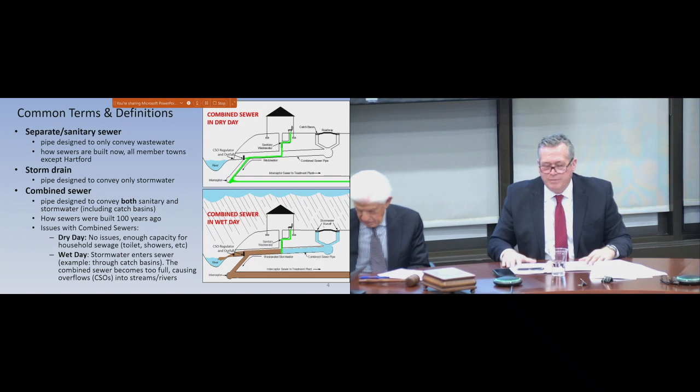So with that, I'm going to turn this over to Jason Waterbury, who's our Assistant Manager of Engineering. Thank you, Scott. Jason Waterbury, Assistant Manager of Engineering here at the district.

Before I get into the gist of this presentation, I just want to go over some simple terms and definitions that you'll hear me reference, or hear Joe Liberty of CDM reference. One of the key things is the difference between a combined sewer and a separate sanitary sewer. Within the city of Hartford, most of the pipes in the road are considered combined sewers. Basically what that means is that all of your sanitary wastewater from your house flows into one pipe, and the stormwater from the street drainage flows into that same pipe.

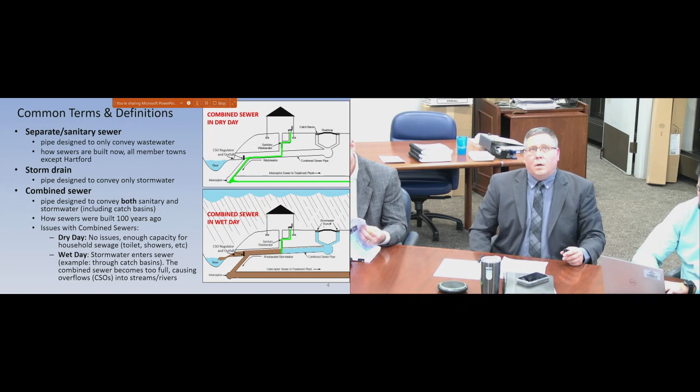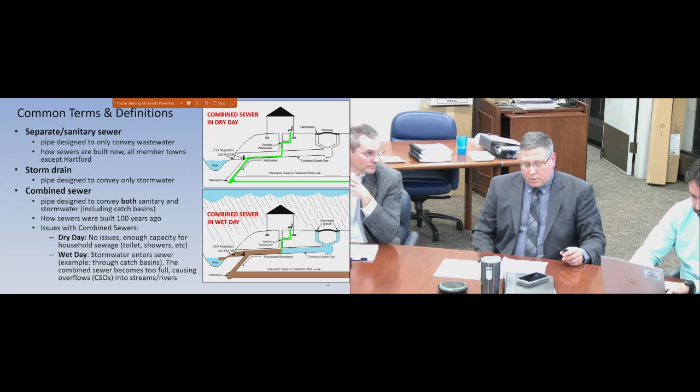It functions perfectly fine on a dry day. However, on wet days, that system gets overwhelmed, and that's when we experience problems, whether it be flow from the sewer backing up into a house, or leaving the system through a designed overflow point, which I'll show on another slide. Outside of Hartford, the majority of the pipes are considered separate, meaning there's a separate pipe for sewer and a separate pipe for storm drainage. One of the key focuses of this new refined plan is sewer separation work as a primary objective for compliance with our consent order. One of the goals and benefits of sewer separation is that it provides full protection of your basement from sewer backups due to wet weather incidents.

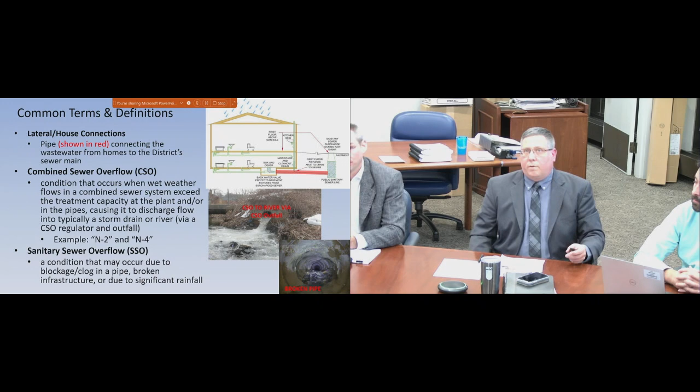This next slide is more terms and definitions, but the biggest one is shown in red, top right: the lateral, or house connection, which we reference quite commonly when talking about the work the district's doing. That pipe, the lateral house connection, is the pipe that goes from your house to the sewer main in the road. It's shown in red on this slide. It's roughly half private property, half public property, but it's the key point that gets wastewater from your house to the road. If it becomes deteriorated or clogged, that's when you start to experience problems. One of the community benefits, which I'll get into later, is the renewal and replacement of that pipe.

As Scott mentioned earlier, we worked on a revised plan with DEEP and EPA starting in early 2023. That plan changed the focus point from our prior 2018 plan, which was approved in 2022. The main difference between the two plans is that our 2018 plan, approved in 2022, did not include or put priority on private property work, whether it be the separation within your house or the renewal and replacement of the lateral itself.

The goal alternatively was to focus on the CSOs themselves. Those are the points where the wastewater will leave our combined sewer and go to the surface water body.

In response to some concerns from the public that Scott had mentioned, we revised that plan. It was memorialized in July 2023 with a new consent order.

The key revisions included expediting private property work, specifically in North Hartford. We increased our spending plan between now and 2030 from $50 million to $150 million in North Hartford. We could not do this work in that manner or schedule without the financial support of DEEP. In working with DEEP, we came up with a plan to treat this as a pilot to see how effective this type of approach is.

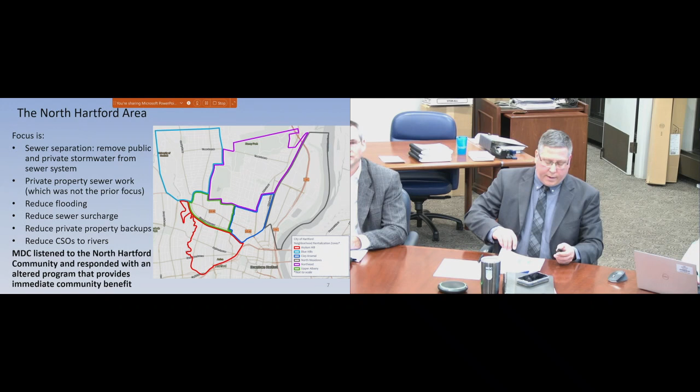Community benefit isn't something we can define very easily, so rather than define it in abstract terms, it was best to give examples of what that really means to the public.

Working right to left on your screen, the 2018 plan, referenced in a couple places, is the original plan that only included about 50,000 feet of sewer rehab or mainline work within the neighborhoods of North Hartford. Our revised plan is 100,000 feet more—essentially 19 miles more of sewer main that we're addressing and rehabbing within North Hartford.

That means 19 miles more of sewer main that is less likely to fail and collapse and cause a backup, an issue, or an emergency repair.

Additionally, our prior plan would have only included about 150 properties where we would have done lateral renewal and replacement, as part of the sewer separation work. Our new plan, in trying to get to this immediate community benefit, includes 3,500 properties. What we did was expedite all of the sewer rehab work that would have eventually occurred within North Hartford, moving it to the front of the program. I'll show that on another slide.

Finally, we know that the sewer separation work, which will provide ultimate protection for homes from wet weather backups, is going to take a long time. So in advance of that work actually occurring, we increased the funding in our backwater valve and private property disconnect program—that's what BWV PPID means on the screen.

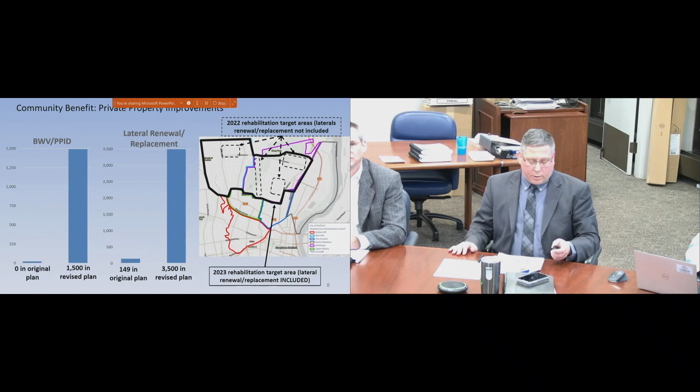One other note is that in addition to the consent order, the district elected to make a commitment that at least 30% of the workforce in North Hartford would be Hartford-based residents. Jeff will get to that, so I don't want to steal his thunder on how we're doing.

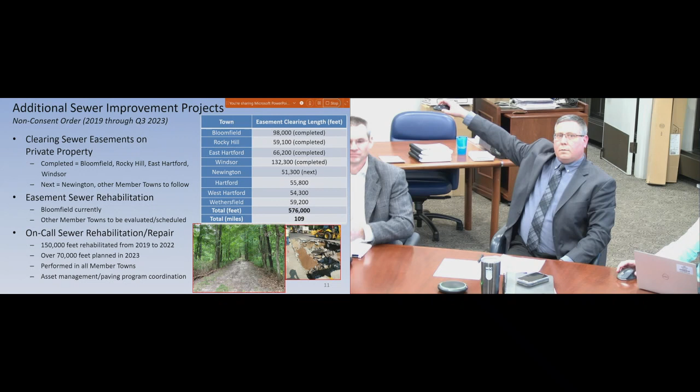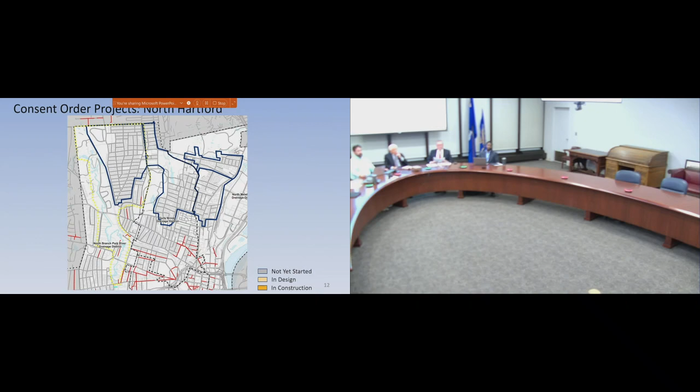I don't want to... point it that way. Technical difficulties. Can you drive or no? Oh, sorry about that. It was working, should I try again? There you go. Nope. Yeah, you did. Oh, no, you're good. Go to the next slide. Yeah, sorry, okay, there we go.

Within Hartford, specifically North Hartford, this slide shows all the consent order projects we're doing. It's going to toggle through, but on the lower right-hand side there's a legend that correlates to the color of the text boxes as they come in—whether it's not started, in design, or in construction.

The first key list of projects we wanted to progress that's in our consent order is what we call our expedited sewer separation contracts. The target was 160 homes that we provide protection to by doing sewer separation work, with an estimate of about 8,000 feet of storm drain.

In reality, we just bid our third package of this work, and with that third package we're at 279 homes of protection and a little over 8,000 feet of new sewer and storm. So we are definitely on track to meet that goal.

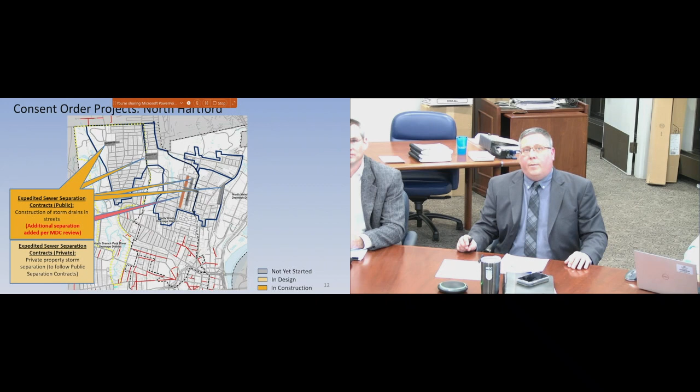One key item is that when these concepts were first conceived back in July, we had an idea of what projects we were going to do. Then through design and talking to the public, it was identified that one neighborhood adjacent to an area we were working in, and that goes through an area we were working in, was experiencing sewer backups and street flooding—the Garden Street neighborhood between Charlotte and Capen. In response, we added it to the bid package of that contract.

Now, the next key item is sewer rehab work in the Tower Ave area, basically Cleveland Avenue and north along Main Street. This includes sewer rehab work and lateral repair and renewal work of approximately 500 laterals. This project started construction back in August and is underway right now. Most of the mainline work is done and they're working on laterals.

The blue area that just showed up on your screen is the North Branch Park River area. This is a large sewer rehab project where we're lining approximately 1,700 laterals and lining all the mainline sewers in that outline. That project was bid and will be starting construction in early 2024.

The greenish colored area is the next big rehab contract, where we're doing approximately 500 laterals and all the mainline work. That one is scheduled to be advertised in January, and we will be beginning construction in mid-2024.

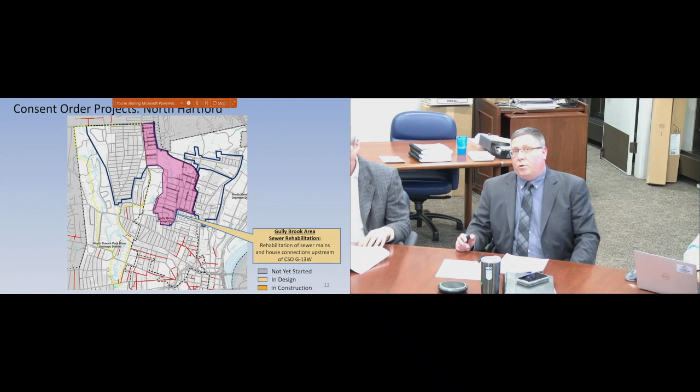And then finally, the pink area, the Gully Brook area. By the way, these names reference drainage areas - it's how our CSO system is managed and permitted. This area is approximately 1,500 laterals, and all the mainline pipe within the footprint of that pink area will be done. It'll be bid in early 2024 and start construction in mid-2024. Collectively, the three that I just showed will be done by the end of 2026.

The yellow area that you see on the screen right now is the footprint of what we call our drainage study. Joe Liberty of CDM will get into more details of this in a couple more slides. However, this is basically the footprint of where we have to do sewer separation work in the North Branch Park River area.

However, when we're doing the design of these projects, we have to take into account and figure out how to get the water from the road into the river. This is an area of known flooding along the river, or known issues with street drainage in general. So in order to make sure that we don't design projects that simply don't work or don't really satisfy the true need in the neighborhood, the district and the city jointly undertook this drainage study.

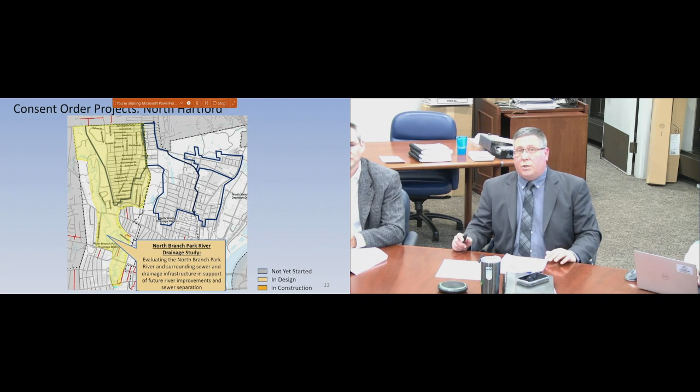So that way the district can design its sewer separation projects to provide the backup protection of the homes and the CSO reduction, and the city can focus on figuring out what needs to be done with regards to the drainage issues within this neighborhood.

From that drainage study, we will get the preliminary design concepts for sewer separation contracts. The first three that we envision doing are what we call Granby 789 - that's the purple area on the screen right now. We expect that design to begin in the middle of 2024. The deadline to have the construction of these three done is the end of 2028.

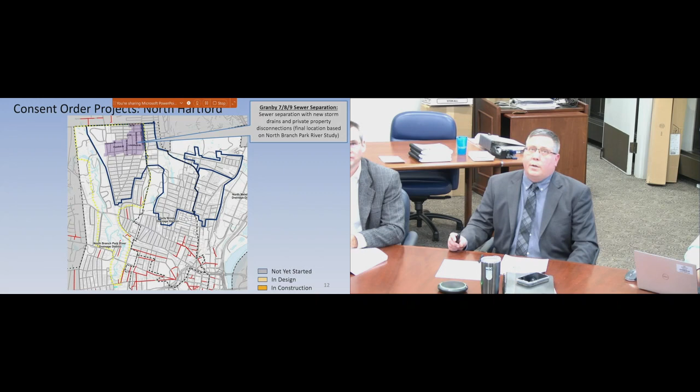So this is just all of them together. As you can see, there's a lot of work going on in North Hartford. However, that's not the only consent order work we have. Like I referenced earlier, we wanted to make sure that we provide an immediate benefit to customers in advance of the sewer separation work and the sewer rehab work.

And to do that, we created one program and really expedited a second one that was already existing. The program we created was the House Connection program, where all customers, regardless of where you live within the district, are eligible for a free inspection of your lateral from the house to the road. And then, if the lateral is needed for renewal, there is funding provided for that.

The sewer backup prevention program, the backwater valve program - that's the 1,500 homes I referenced earlier. That is basically something where customers are able to call in. You'll get a free assessment, and then whatever backup protection is needed at your property, whether it be the installation of a sump pump or replacement of a backwater valve or backwater valves plural, that is covered by that program.

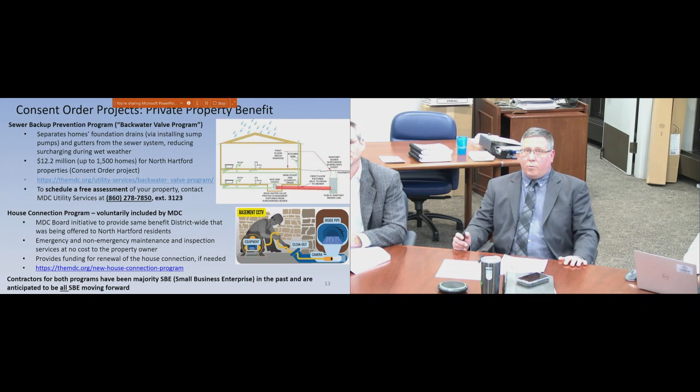And one of the key points on this slide is the web links that are available to provide you more information, or the phone number if you are interested in participating in either program.

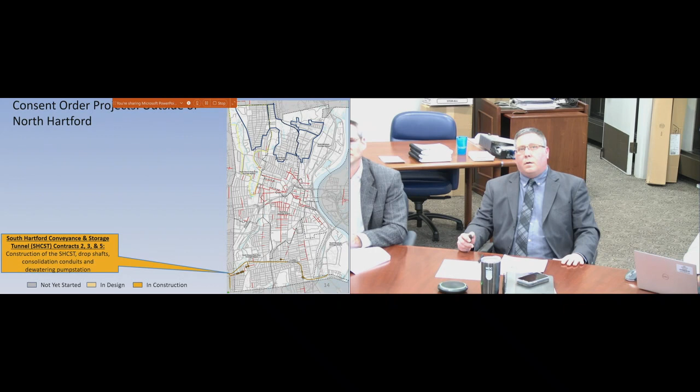Now, outside of North Hartford, we still have consent order projects. Let me toggle - actually, sorry, it's easier if I just see them all at once.

We have lining work in Bloomfield. We have lining work in Gully. Actually, this is other Hartford work - I jumped ahead in my mind. We have lining work in Bloomfield, and lining work in Gully.

We have rehab work in what we call our 18-inch brick sewers. And most importantly, we have tunnel contracts 2, 3, and 5, where upon completion, the SSOs in Hartford, West Hartford, and Newington will be considered eliminated. So this is additional consent order work in Hartford, not just North Hartford.

Outside of Hartford - this is what I was getting to previously - we have rehab work in Bloomfield and West Hartford. These projects will occur over the next couple of years, West Hartford being the first one. We expect that to be advertised in early 2024, with a completion date of the end of 2025.

One of the key points in all of the work you see on the screen right now is this will not only benefit the towns of West Hartford and Bloomfield, it will also benefit the Hartford sewer system, as the reduction of extra water, groundwater, and stormwater in these communities benefits the sewers in Hartford, as that's ultimately where these sewers currently flow.

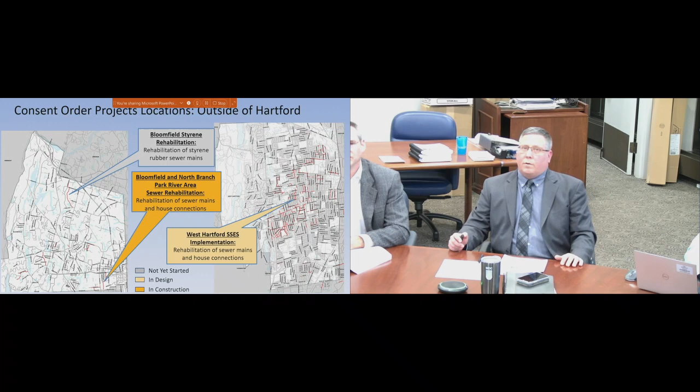Additionally, the district staff are continuously coordinating with the city of Hartford. One key coordination point we currently take part in is, in advance of any wet weather event, district staff will go assess areas susceptible to frequent street flooding during rain events. If the catch basins within those areas are covered with debris, we'll notify the city of Hartford so they can remove the debris, so those catch basins perform better during rain events and reduce street flooding by increasing capacity overall.

The next 4 slides are requirements for what we need to provide an update on in our consent order. This one and the next are what Scott references as key performance indicators. This first one is district-wide; the second is just within North Hartford. You'll see over time, as we go through quarterly updates, the total-to-date numbers will increase.

Right now we're just showing Q1, with all the work since 2019. We chose 2019 because that's essentially when we started increasing all our rehab work as part of our 2018 plan. You'll see significant increases in the next couple of years in private property disconnect work, backwater valve work, and sewer lateral work.

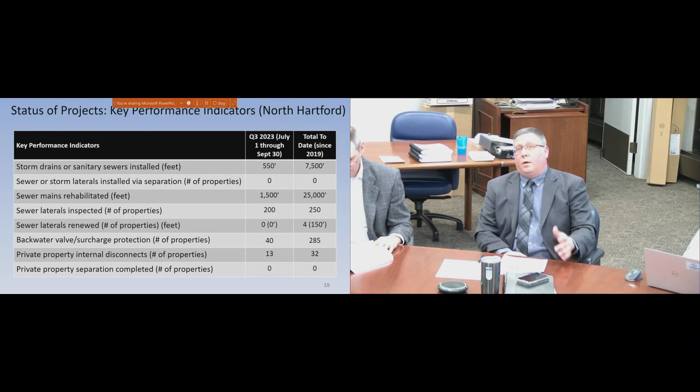Now, this slide and the next are the last of the consent order metrics we have to report on regarding how our CSO system is performing. This slide focuses on CSOs N2 and N4. Those are the 2 CSO regulators located within North Hartford, essentially within the Granby area.

The key metrics we use to measure our performance with regards to our consent order for CSOs assess 3 different storms, or 2 depending on the location. One is the 1-year storm, a storm that statistically would happen once a year. The next metric we work with DEEP on is what we call a typical year - an average year with an average spread of small and big storms. It was selected years ago when we started our regulatory work back in 2006, and it's been our measuring stick ever since. It's how we perform in that typical year.

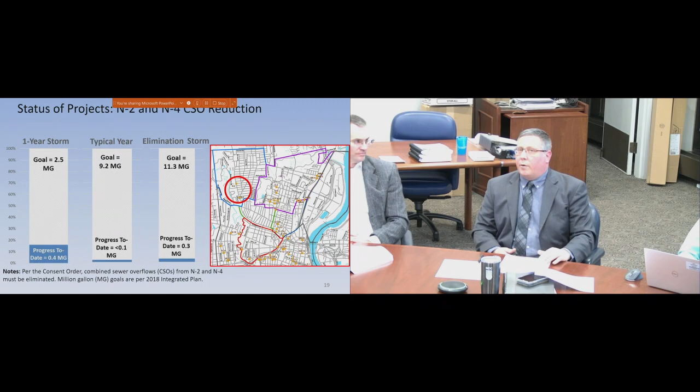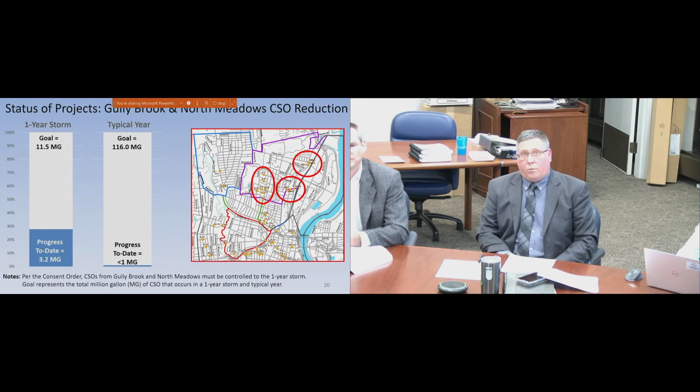The last of the CSOs that we had to report on in our consent order are the CSOs in the Gully Brook area and the North Meadows area. The only key difference between these and the ones on the prior slide is that they do not discharge to a Class A water body. Therefore, the requirement in our consent order is the 1-year storm, which is why you only see the metrics for the 1-year and typical year. As the rehab work, lateral repair work, and sewer separation work in these areas progress, you'll see these numbers increase.

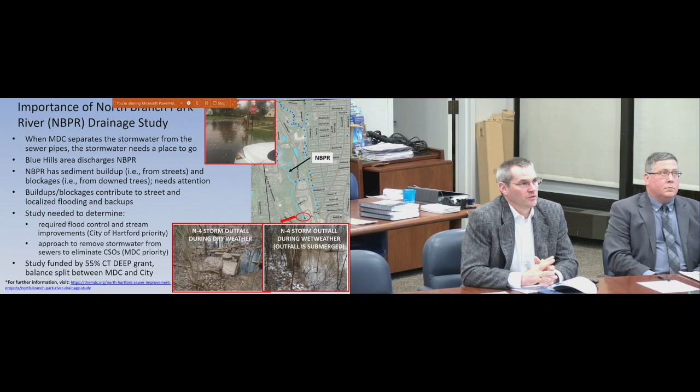And with that, I'm going to hand it over to Joe. All right, great. Thank you, Jason. My name is Joe LaLiberty with CDM Smith. CDM Smith is the program manager consultant for the Metropolitan District on the Clean Water Project.

We are also leading this North Branch Park River drainage study. I know the North Branch Park River has been talked about a lot over the last year or more, so we wanted to talk about why we needed to do this study in order to determine how best to do the sewer separation work in the North Branch Park River Drainage District, which includes the Granby area, basically the Blue Hills area. As Jason mentioned earlier, when the city of Hartford was built, like many cities across the country, they were built with one pipe in the street.

That one pipe would take both the sewer from your residence—your bathroom, your shower—but it would also take the stormwater from the street, the water that goes into the catch basin with the grates. That one pipe, referred to as a combined sewer, would then overflow to a receiving water body, in this case the North Branch of the Park River.

So with separating the area, what we'd like to do is build it like it's built today. If you were building a new development, it wouldn't be built the way it was built 100 years ago. You'd build it with 2 pipes in the street: one dedicated for the sewer from your home, and the other dedicated for the stormwater from the street, as well as any stormwater on your private property.

So when we talk about separating, we need to build another pipe—in many cases, a stormwater pipe. And that stormwater pipe needs a place to go, a place to discharge. In the case of the Blue Hills area, which is in the North Branch Park River area, it discharges to the North Branch of the Park River.

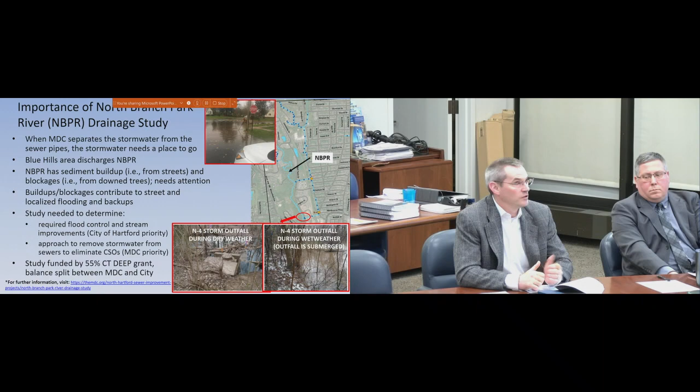That study was funded by a 55% grant from the Connecticut Department of Energy and Environmental Protection, with the balance, 45%, split between the City of Hartford and the Metropolitan District. If you want additional information, there's a link provided on the slide. Now a little update on where we're at with the study.

This is through Q3, the end of September. At that point, the river assessment was ongoing - we basically walked the river to determine its condition, where there was sediment, how much, and where the blockages were. We have since completed it, so when we report in March, we'll talk about how in Q4 we completed the assessment.

While we did that, we identified some short-term improvements, and both the MDC and the City of Hartford have addressed them. The first is shown in the top picture - a 96-inch storm pipe.

That pipe is located right near Weaver High School on Granby Street, just upstream of where there was prior significant flooding. We found that the pipe was completely blocked, or nearly so, with trees, branches, and debris, discovered during inspection within the pipe. It's a 96-inch pipe - I'm 6 feet tall, so it's 2 feet taller than me. It's a very big pipe.

So the city immediately hired a subcontractor to clean the pipe. There's still more cleaning to be done, but they've improved the situation, which hopefully will help abate flooding going forward in that area.

Another location had down trees, shown in the middle pictures, which have been identified. The city had removed some of those down trees in the past near the Scarborough area. There are additional areas that will likely be identified and recommended in the upcoming report.

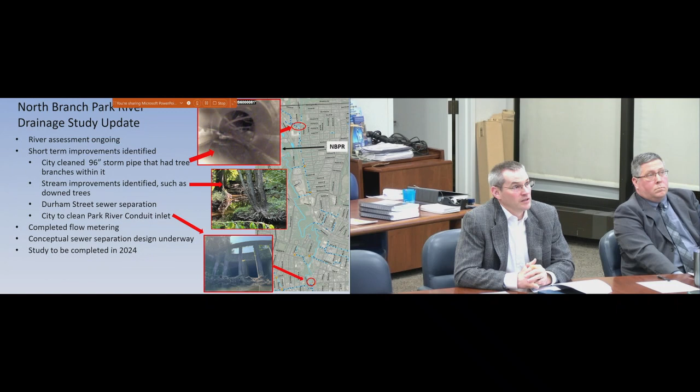And that's it. At this point, I'd like to turn it over to Jeff, who's going to talk about the disadvantaged businesses outreach and the Hartford labor workforce. Thank you, Joe. Jeff King, construction manager and diversity compliance officer.

As Scott said, never before has the MDC taken on a goal that 30% of all the hours worked on the projects in the north end would be completed by Hartford residents. Because this was a new initiative, we had to hit a lot of areas and hit them at multiple times and on different fronts.

So we first had to locate the qualified contractors, then start going to events to promote the work that we're doing. And then we started building a workforce development program to bring all these components together.

The first thing the procurement department did was reach out to solicit SBE, MBE, and WBE contractors. The small businesses, the minority businesses, and the women businesses all fall underneath the disadvantaged business umbrella.

With the partners we reached out to, the MDC did a registration clinic. We teamed up with Connecticut Apex Accelerator, previously known as PTAC, the Procurement Technical Assistance Center, the National Association of Women in Construction (NAWIC), along with the University of Hartford and the CCIA, the Connecticut Construction Industry Association.

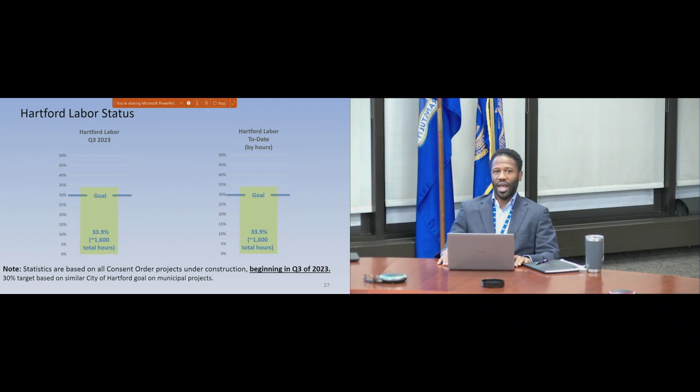So in order to get all this work done, we have a lot of outreach that needs to happen. Jason talked about all the projects that we're jumping off in the north end of Hartford, all the different studies that need to happen through the North Branch River, and Julie McLaughlin and Nick Slemy, who head our communications department, they do an awesome job getting out project updates, and we do that in various ways. We have meetings that we're holding and attending, so we make sure we let the public know of that. Another way, when we're hitting large areas, we do mailings so that we can let the overall community know what we're doing in the area.

And then we also do a more door-to-door approach. So when projects are starting, we go directly to the property owners and stakeholders who we're impacting, so we can talk to them one-on-one and keep them up to date throughout the process.

So, just like the workforce development and the different events, outreach definitely takes a lot of community partners as well. So we, in the Durham Street area and other areas, we actually set up workbenches, tables, and we would do that in the morning and in the evening. We would have our contractors there, we would have the engineers there, we'd have MDC construction managers there, and really let the community know we're here to answer any questions, really give them a hands-on A to Z approach on how we would be doing these separation projects and what they could expect as far as impact to their private property. We also participated in the local NRZ meetings and also community group meetings like the Greater Hartford African American Alliance.

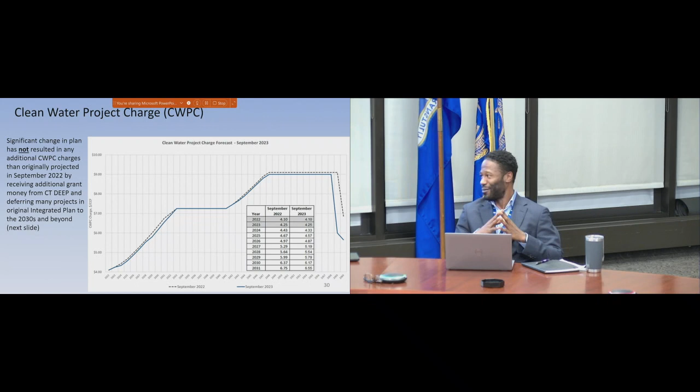Thank you, Jeff. I just want to reiterate, I can't express how much work the people in the audience and our staff that aren't here tonight or on the phone have performed to get us to where we are. We started construction in July, and we self-imposed a number of things we didn't have to impose on ourselves. Almost everything Jeff talked about was exactly that. But to really understand, I don't believe there's another utility, in my opinion, in Connecticut or across the country that could have done what MDC staff have done. And it was with huge support from our board and DEEP staff as well, working together. So I really commend everybody, because we can't even express how much work has gone in since July to get where we are here today.

This slide is really important. Through all of our negotiations, discussions with DEEP and EPA and the community and the legislature, the one thing that we tried to emphasize is we want to provide a community benefit that may not directly impact the CSO at the river immediately, but solves the same problem, just might take a little longer.

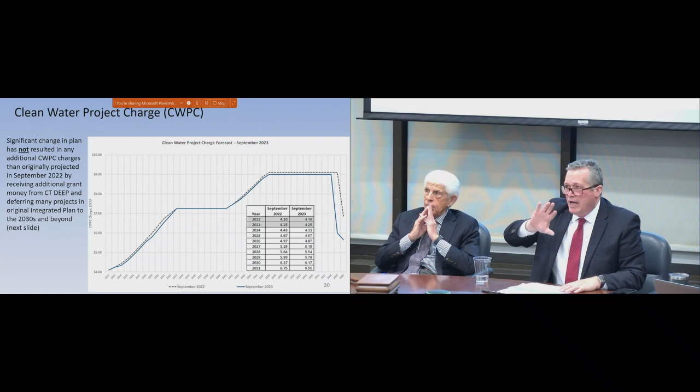So the first step was, we agreed with DEEP, let's push the downtown tunnel, which was supposed to start in 2038, right off the map—push it right off the integrated planning process, and it's now well beyond 2050. Hopefully the goal is we'll never have to build it, because separation will achieve the same goal that the tunnel is supposed to achieve.

The other challenge was all of these laterals, millions of dollars of laterals—yes, great, we're getting a 50% grant in North Hartford, but we also had to provide the same service to our other customers in other parts of Hartford and the other 7 towns. So there's an expense and a cost to that.

We agreed with DEEP finally to take some projects, about $300 million worth, and push them outside the schedule of phase 1—so outside of the next 10 years.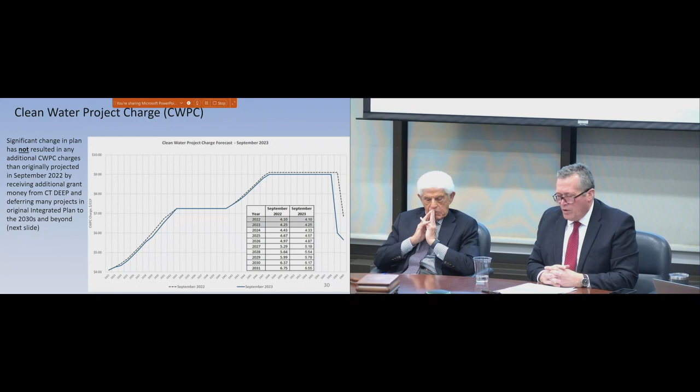And that allowed us to provide free laterals to everybody, which is roughly a $10,000 benefit, and provide all this private property work to our North Hartford residents and businesses, all without increasing the clean water surcharge rate that we proposed in '18 and finalized in September 2022.

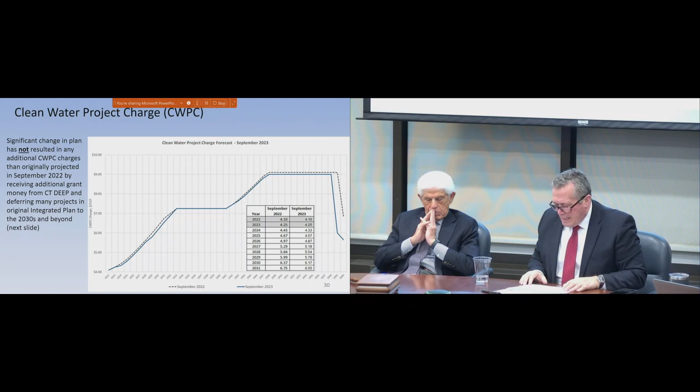Just as an example, and it's on this chart, though you may not be able to see it: the planned rate for 2024 was $4.43, and the rate that was reviewed and approved by the board for 2024 is $4.33. So we actually were able to stay under the rate structure that was planned and scheduled to be imposed in 2024.

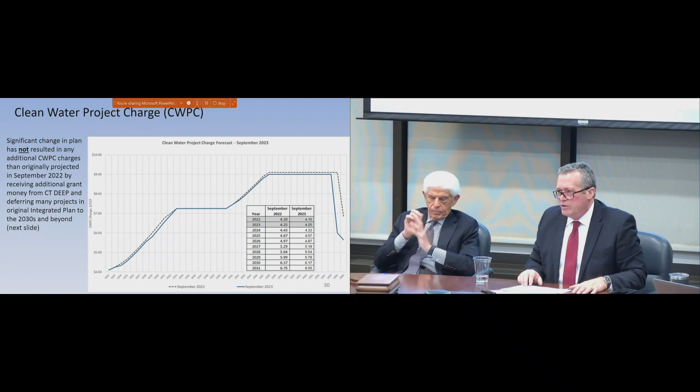How? Because the state of Connecticut stepped up and gave us a 50% grant for all of this work in North Hartford. We gave free laterals by ordinance, approved by the board, for all of our other customers. And then we shifted the tunnel and shifted $300 million worth of work.

We have a remaining project that we have to do, we call Contract 4A, 4B. That's going to be the project that eliminates overflows to the Wethersfield Cove. We have committed to DEEP that by the end of 2027, we will have a drainage study done so we can assess what we have to do to achieve that goal.

Again, I can only say thank you to the chairman, Mr. DiBella, our commissioners, DEEP, EPA, our staff. I'm so proud to be part of this organization because no one else could have done this. I do think that everybody in this room has had a major part in that.